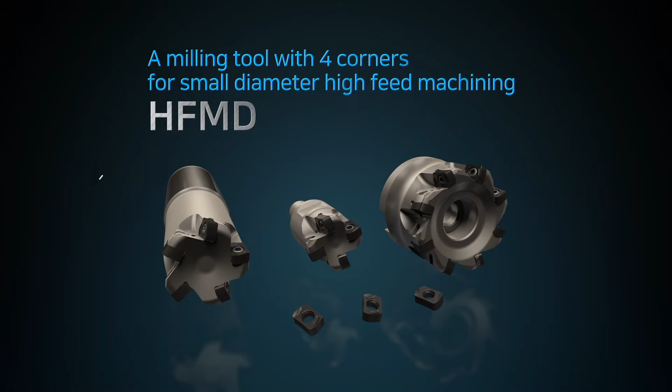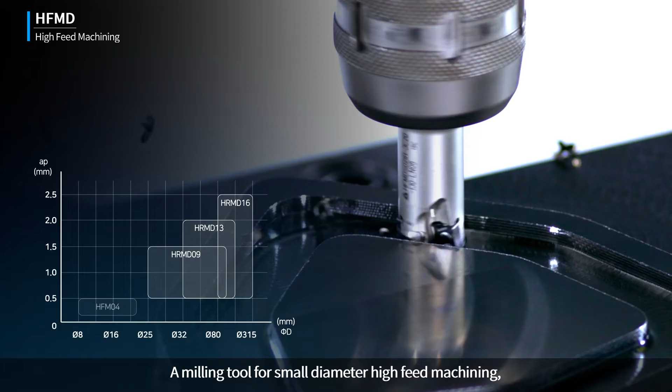A milling tool with 4 corners for small diameter high feed machining, HFMD. A milling tool for small diameter high feed machining, Hfmd ensures excellent productivity with more corners and higher feed.

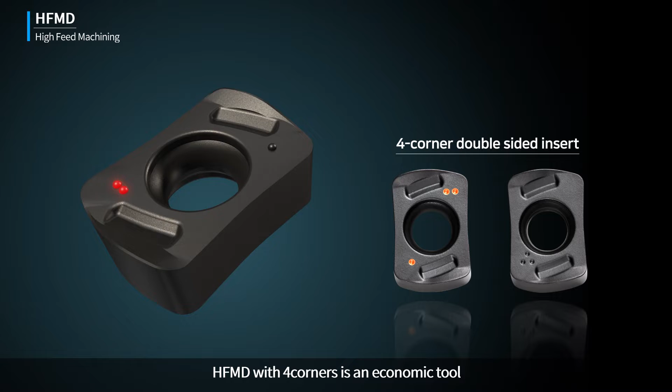Hfmd with 4 corners is an economic tool and ensures high productivity with its slender shape, clamping more inserts.

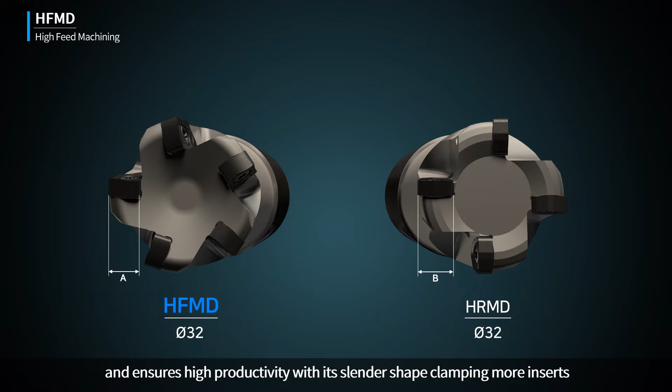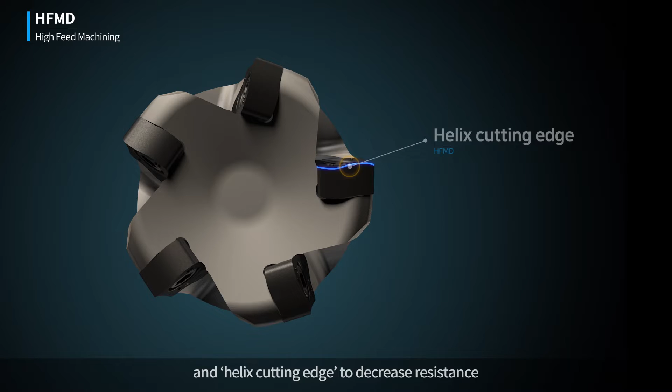Hfmd realizes superb machinability, applying high rake angle and helix cutting edge to decrease resistance. The color and shape of chip after Hfmd machining show decrease of cutting resistance.

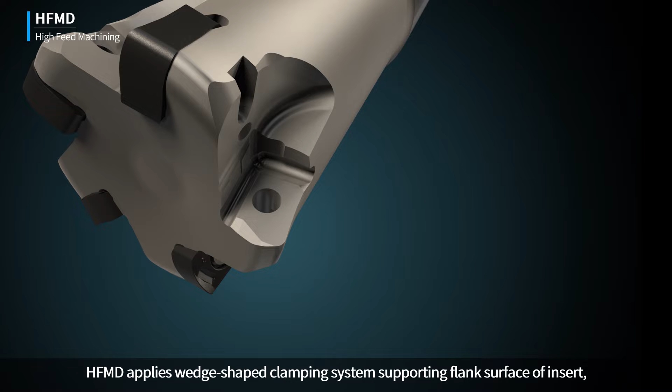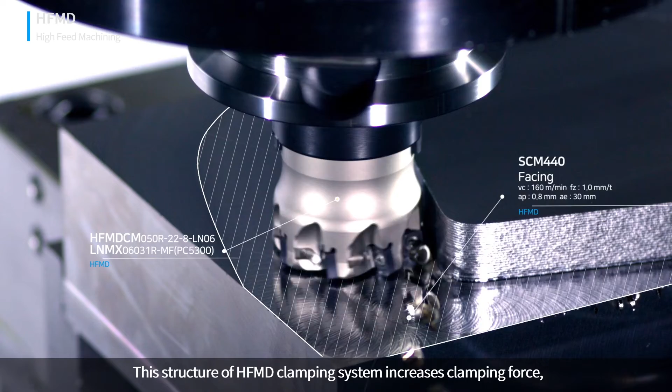Hfmd applies wedge-shaped clamping system supporting flank surface of insert, wide clamping side, and strong screws. This structure of Hfmd clamping system increases clamping force, prevents chipping and fracture, and decreases vibration and noise in machining. The powerful clamping force of Hfmd prevents fracture in high-feed machining and ensures stable machinability.

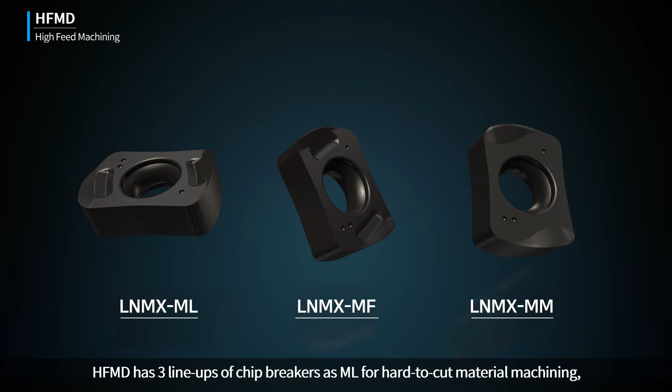HFMD has 3 lineups of chip breakers as ML for hard-to-cut material machining, MF for light cutting, and MM for general machining, and 3 lineups of holders as shank, cutter, and modular type.

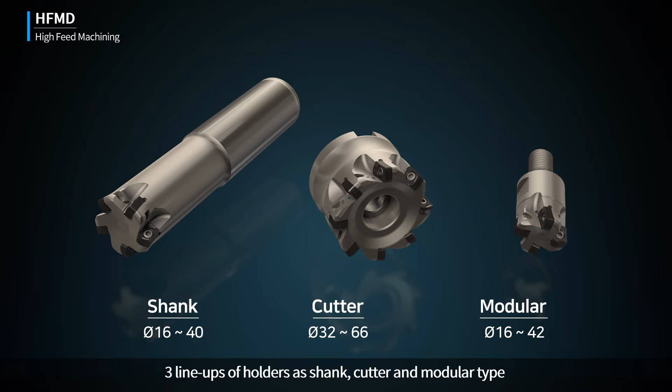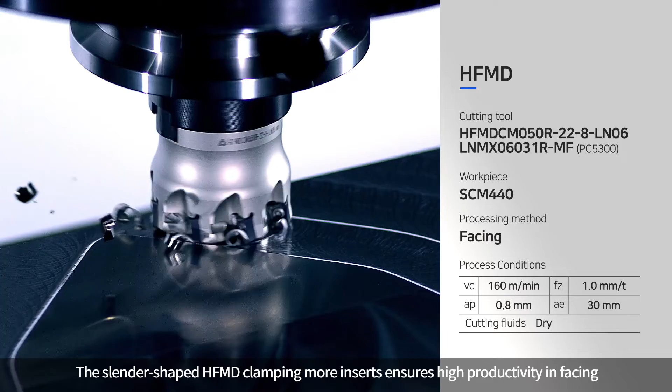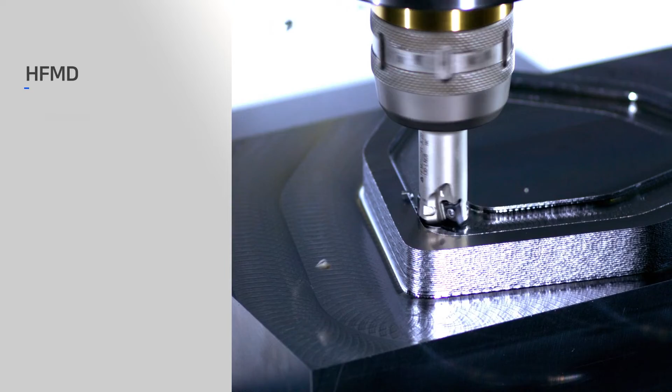The slender-shaped HFMD clamping more inserts ensures high productivity in facing. Optimal design of HFMD to decrease cutting resistance realizes various kinds of machining and high machinability.

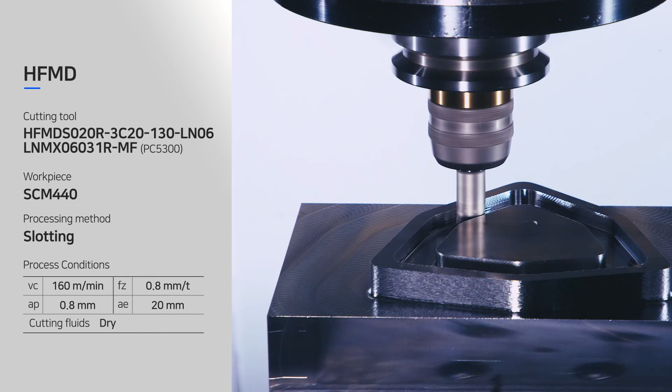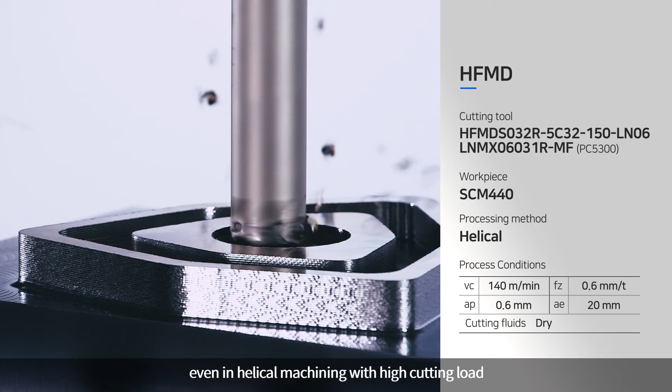Especially, the strong clamping force ensures excellent machinability, even in helical machining with high cutting load. A milling tool with 4 corners for small diameter high feed machining, HFMD.